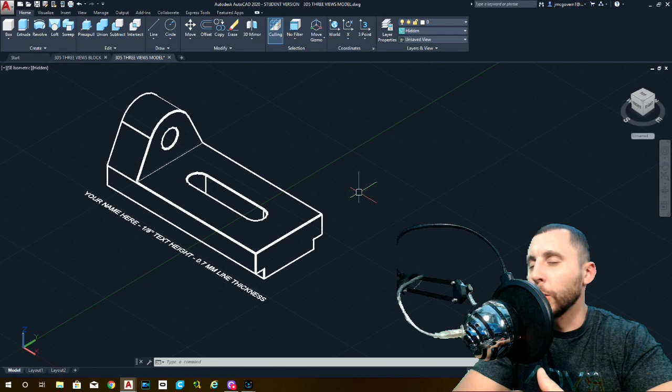Looking at 3D5 and our old title block here. Don't worry about that. This is the first one that you can probably draw from different sides to start, but there is one that's not the front that would be the easiest one, I would think, okay? And that would be the right side over here.

If we draw this right side first, this flat view, we're then able to join the bottom shape and join the top shape, and then pull the top shape at 7/8 and pull the bottom shape at 4.5. And then that drawing is like almost done. We'd have to do the top stuff, we'd have to subtract the circle and so on.

So let's get going here. Let's see. We got half, quarter, quarter, 1.5, quarter, quarter, half. So let's go into here.

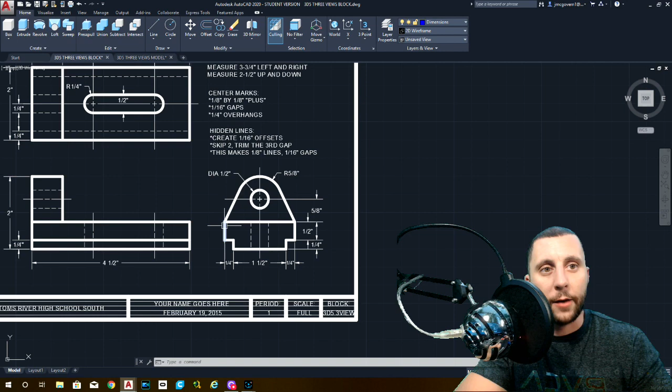I'm going to get rid of this stuff. I'm going to go back to the right side because we're drawing the right side here. So this is important to make sure that you're on the correct side.

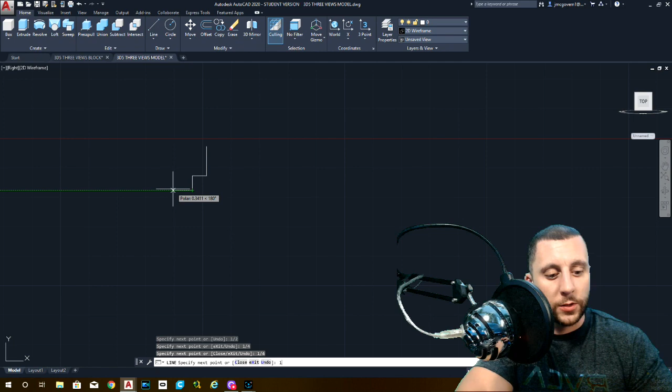I'm on 2D wireframe. So this is half, quarter, quarter. Stay on that green line, F10. This is 1.5, and then quarter, quarter, half, and then close. So that's the bottom shape, okay?

Now, you could draw these separate. It's up to you, and then put them together later, or you could just draw right up from here.

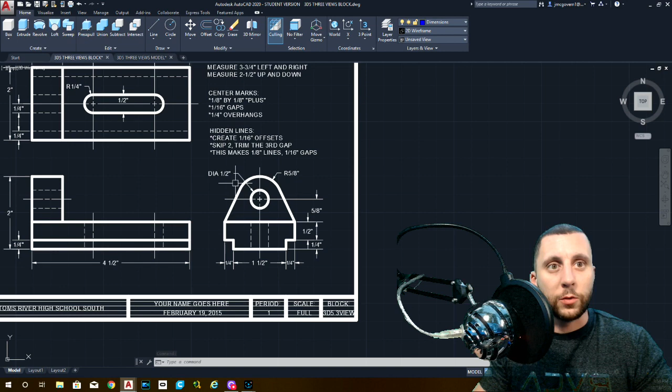So if you do an offset of 5/8, I believe it's 5/8. I'm going to check in a second. Yes, 5/8 gets you to the center of both circles, okay? So that's a 5/8 radius out there as well, and then we have a diameter 1/2 in the middle.

So going back and forth between here, make sure we're videoing still, good. We have a 1/2, which actually should be a 1/2 diameter, sorry. Circle, D for diameter, 1/2. Oh, I guess D for diameter does not work.

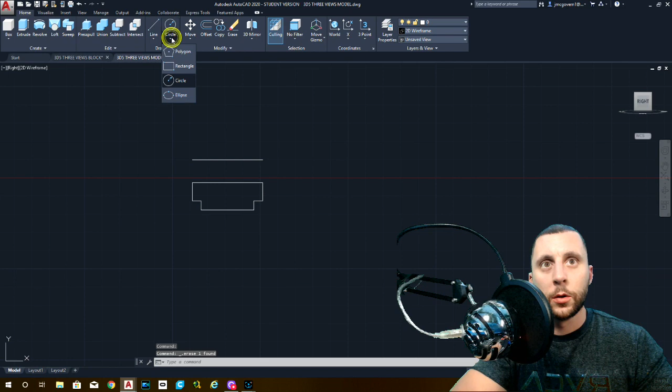Well, alright, I guess I gotta go back to my 2D tools. Hang on, let me see what it actually says down there. Maybe you have to hit the center first. Oh yeah, sorry, center first, then D for diameter, and then you put your 1/2. Sorry, I'm being stupid. Alright, second circle is a radius of 5/8.

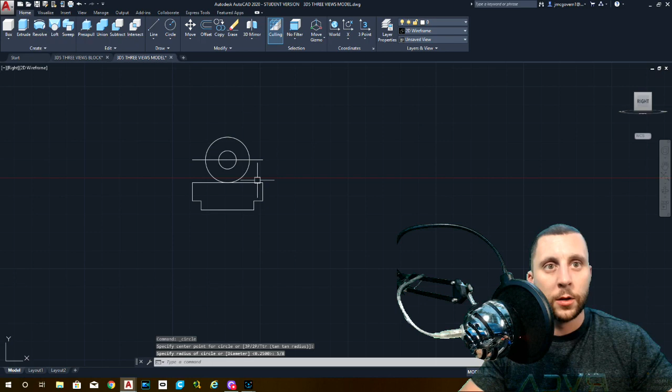And then what you're going to do is you're going to trim and trim. You can then get rid of this line, and now you're going to do what's called a tangent point, okay? So if you go into OS enter, you want to make sure that tangent is checked, because otherwise you won't get the tangent snap point, and then hit OK.

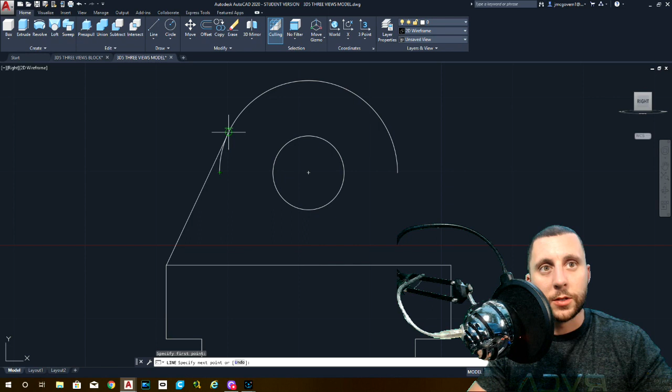Start your line, go from here, and don't go to the end, but go to the tangent point on both sides. That'll tell you, and you know it's tangent because it just barely touches the outside of this circle and then kind of swoops around, alright?

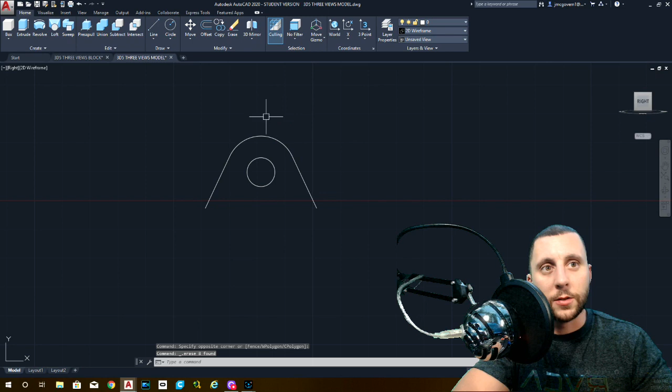So here's the thing. I said before we need like 3 different pieces here, but really 2 main pieces. This line, if I use this in this join down here, I then won't have another line to use in this one. So this is the first instance where we need a double line. I'm going to have to put a second line right there.

So now when I click once, I'm getting the topmost line. And I'm going to take these and I'm going to join them. This should say 1, 2, 3, 4, 5, 6, 7. That should be an 8 to 1.

And then with a blue box, you can see there's that second line back there still. This should be a 1, 2, 3, 4 to 1 join. Okay, so now we've got 1, 2, 3, and we're good to go.

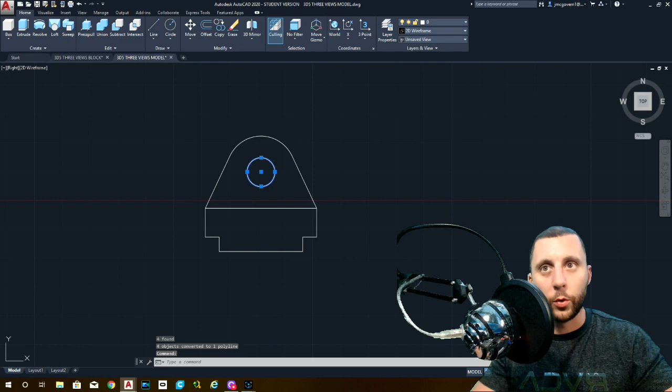We go back to the top, to the bottom right corner. We pull these two and extrude a positive number. This is where a positive number is important because it's pulling it towards us. And then the bottom one, I think it's 4.25, no, 4.5. So this one is going to get extruded 4.5, a positive number.

Let's do subtract: click the main model, hit enter, click the circle, enter, because that circle is getting taken away from this one, not from this one. Let's do a union of this and this, enter, that puts those two together.

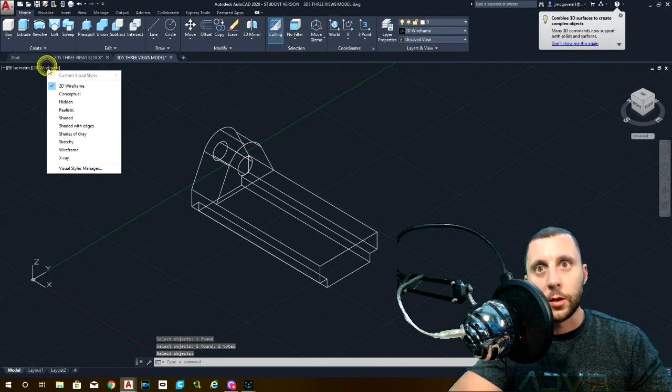Let's check it on conceptual. Looks pretty good so far. Go back to 2D wireframe.

We now need to build this shape on the inside. That shape is from the end line 1 and then 1 3/4, and at the center marks of those you're going to have a radius of 1/4. So it's building a 3D model within a 3D model, which we did back on 3D 3 and 3D 2.

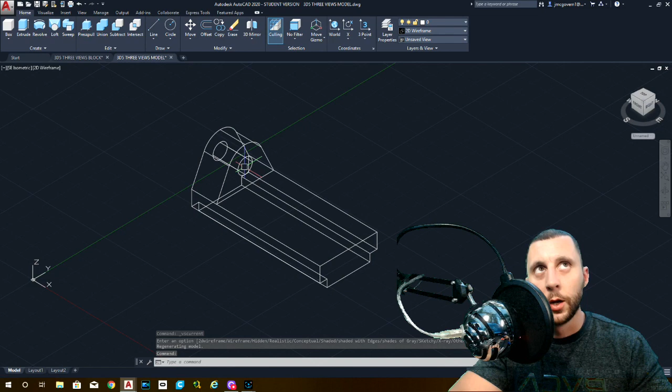Okay, so I'm going to put a line here, and I'm going to use that with offset to go 1 inch and then 1 3/4. If I orbit this, you'll see at the center marks of those lines is where I want to put those circles.

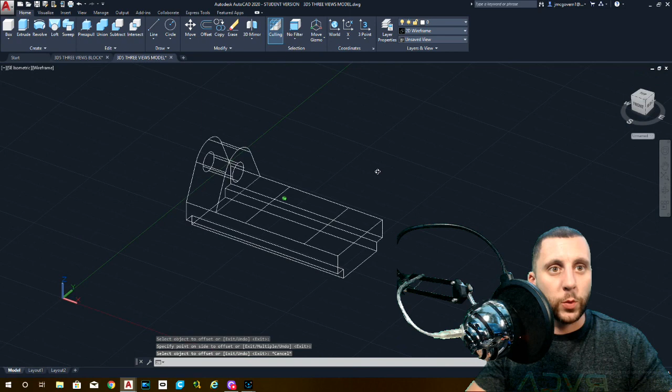So if it helps, go back to the top so you don't get confused. These are the two lines, and at the center marks you're going to put two circles. They are radius 1/4, radius 1/4. Then you can see that we're just going to trim those circles in half. We're going to connect them with two lines, and then we're on our way.

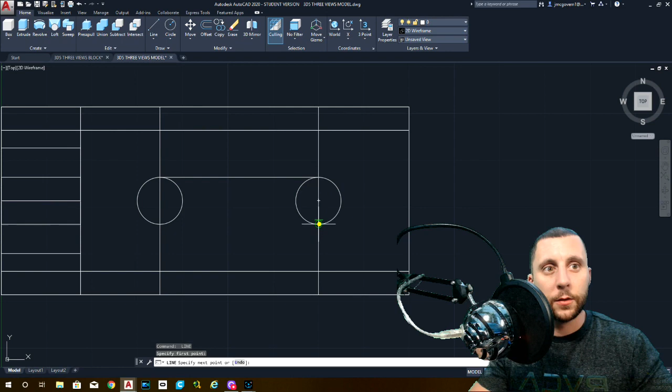Connect, connect, trim, trim. Do I need these anymore? No, they were only there because I needed to get the center points of those circles. Delete. You can verify that they all went on the top surface, which is where you want it to be.

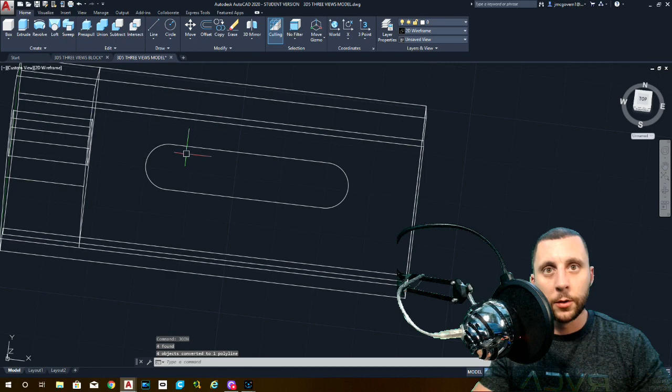I want to take these four and join them together. Make sure it says 4:1 polyline. I'm going to reset my view here because it's getting a little bit confusing.

And now I need to know how far to extrude that down. That hole goes all the way through. So what is the height of this block? Well, we got half plus 1/4, so we're looking at 3/4. And you can tell that it goes all the way through based on these dotted lines that I put on the plan itself. Okay, so this is going to get extruded down.

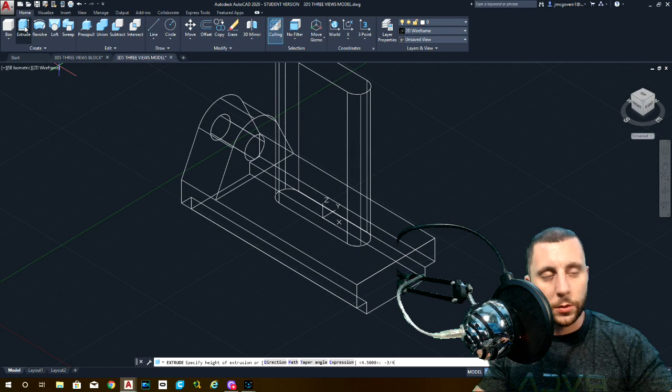Down is going to be a negative number. Negative, what did I say? Negative 3/4. And then the last thing would be subtract from the main model. Enter, small model, enter. Double check it on conceptual.

Do an orbit. Don't forget your orbit trick. You don't have to go over here. You can hold down shift and hold down the scroller on the mouse and then move the mouse around, and that's for orbiting as well. Looks pretty good. Always reset your view.

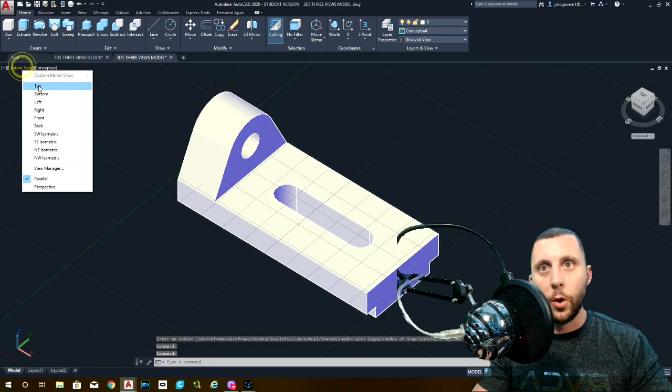When you're ready to print, make sure you save it. Always go to hidden. You put your 0.7 line weights on there. You put your name, 1/4 inch text height, and then you print it out.

When printing, I didn't say this in the last video, but you guys should already know this at this point. Printer is going to be 5225. You're going to be on center the plot, and then you're going to do window, and that's going to bring you back to the drawing, and you're going to draw a window around your object and then hit OK for print.